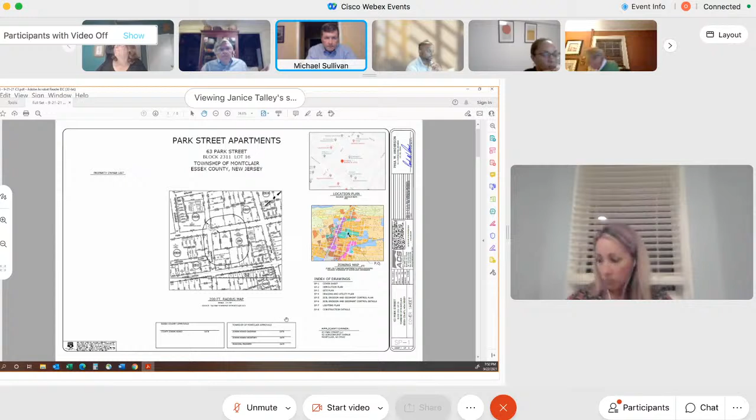Okay, Mr. Anderson, would you raise your right hand? Do you swear to tell the truth in the matter pending before the board? Paul, I think you don't have your microphone turned on, Paul. Okay, Paul. Nope. Paul, we should be able to hear you now. Can you hear me? Yes. Oh, perfect. Yes, I do.

All right, would you state your name and address, please? Paul W. Anderson, 40 Miller Drive, Boonton, New Jersey. Thank you, Paul. If you please could very briefly go through your educational and professional background for the board. Sure. I have a Bachelor of Science in Civil Engineering from Clarkson University, 1983. I'm licensed as a professional engineer in the state of New Jersey since 1988. And I have been accepted as an expert witness before this board previously and many other boards throughout the state of New Jersey as a professional engineer and professional planner.

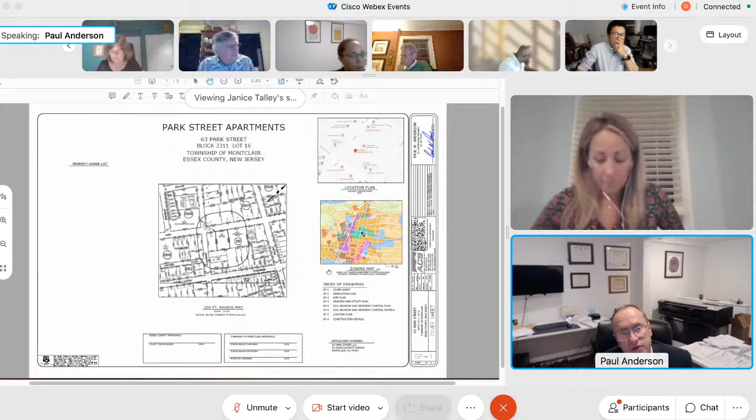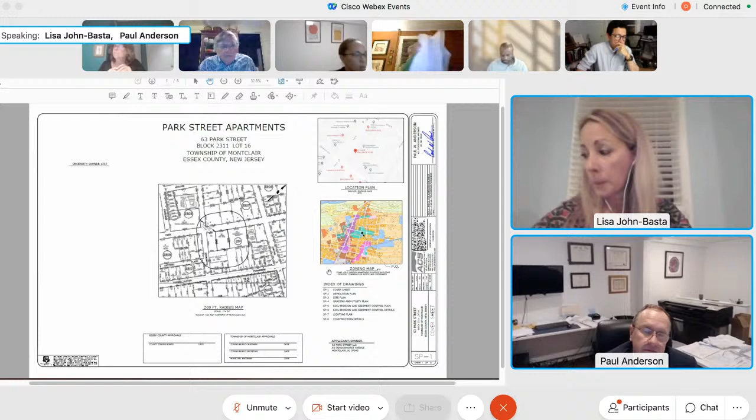Tonight I'll be talking about engineering. I am the principal with Anderson Consulting Services. We prepared the site plans that are before you this evening. And your license is still current in civil engineering? Yes, it is. I ask that you please be accepted as an expert in civil engineering. Okay. Thank you. Paul, if you could start by discussing the site aspects and the revisions to the plans that have been made since the last time the applicant appeared before the board.

Certainly. Previously, we had an addition of 900 square feet on the proposed structure, and that has been reduced to 372 square feet. And as mentioned in the introduction, that has allowed us to increase the side yard setback to the addition that is proposed from 7.8 feet to 20 feet. And that is a conforming setback in this zone. We also reduced some of the parking in the front of the building. So the reduction in the addition and the parking has changed the impervious coverage by 4.8% from what we had before the board last time.

The zone permits 70% impervious coverage, which is in this case 18,591 square feet. We previously had proposed a conforming 64.4% or 17,105. But with the reductions that we've made with this current submission, we have 59.6%, which is 15,828. So this is actually a reduction of impervious coverage from what is there existing today. Existing today is 62%, and we're going down to 59.6.

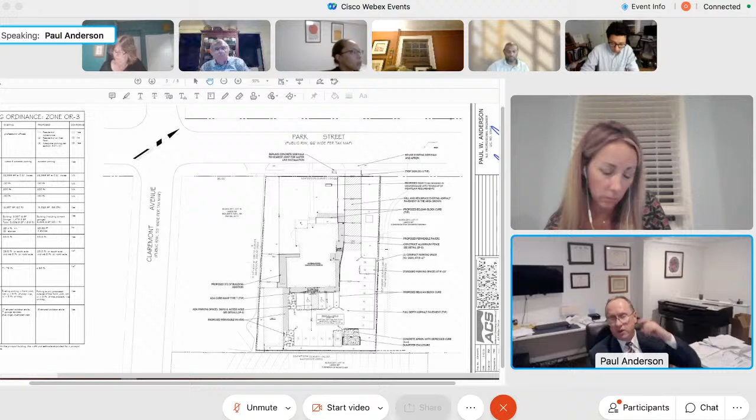The proposed is 38.93, but that is simply somewhat of a technicality in that the average grade around the building, once we connect the garage structure in the back, which has lower existing grades around it, changes the average grade slightly lower. So you have about a 6-inch change in the building height based on the calculation method. But what you'll see from Park Street is a ridge line that is exactly the height that it is today.

So if you look at the drawing on the screen, you'll see a hatched area of the driveway coming in. And if you know the existing site, you'll know that there is existing diagonal parking to the right of that driveway as you're looking at the plan. We were previously going to reuse that parking as compact parking spaces. We had proposed 23 parking spaces, but we removed 4 of the compact parking stalls, and now we only have 19 parking spaces proposed, 1 of which is compact.

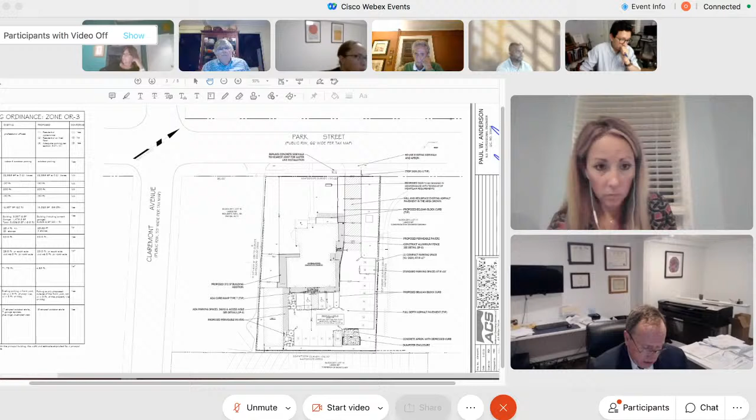And that allows for us to have a wider aisle. We have a 22-foot aisle in the area that is coming from Park Street to the back of the parking lot, and we have a 24.6-foot aisle in the back. Functionally, a 22-foot aisle is below your standard.

It does work in terms of most cars today are smaller than what you see on the turning templates, and what is required for 22 feet will make it with most small cars. If you have a larger car like a Suburban or something of that nature, it might have to do it in 2 moves, but it's still a very functional parking space, and that would be basically for 6 spaces that come down. After that, the rest of them have adequate aisle space behind them.

The number of parking spaces we propose is 19. The ordinance requires the greater of what is required for the office or what is required for residential. In this case, the residential is the controlling ordinance, 17.6 spaces, so it would be 18.

But also there is a new statute out that says if you provide vehicle charging stations, which we have 2, 1 on either side of the handicap spaces in the back of the building, then you can count those as 2 spaces. So we can reduce 2 from that, making the requirement for this project 16. We're still providing 19.

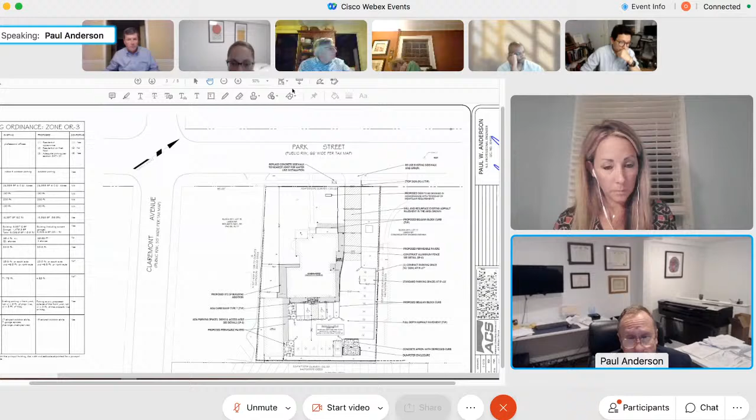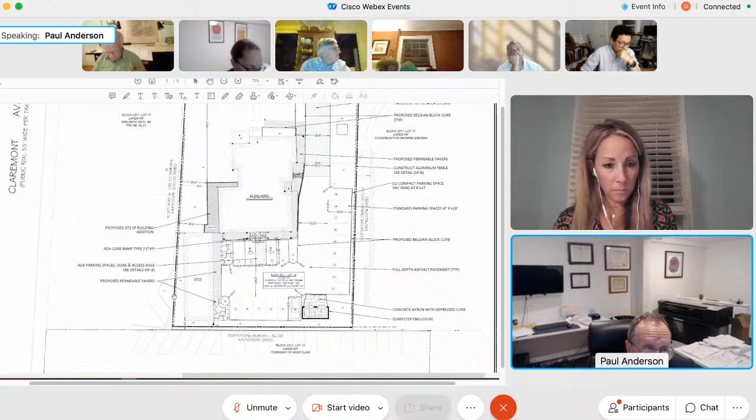As I mentioned, in the back by the 2 handicap spaces, I showed 2 small squares, and they're on the dividing line between the handicap spaces and the spaces next door. Those are intended to be the electric charging stations. And I thought I had them labeled. If I don't, I'm sorry, but that's what they are intended to be.

I selected that location to be between spaces so it doesn't impact the overhang, and also so that vehicles that were in the handicap spaces as well as the space next door could use the electrical charging station. So you could actually serve 4 spaces with that electrical charging.

There was some question previously about the location of the ADA parking stalls. I believe the location that we have is the best location, and it's compliant with the ADA requirements. There's a side door that goes into an elevator for the residential upstairs. There's no way to use the parking spaces 17, 18, or 19 for that because there's a minor grade differential there. So there's about a 2-foot high retaining wall, and the people who were using those spaces would have to come all the way down to the end to get behind the retaining wall anyway.

And then in addition to that, the slope on the asphalt in that area is 3.5%, which exceeds the slope requirement that ADA permits. So we have the parking spaces in the back, which have an access ramp and a relatively flat sidewalk, meeting all the slope requirements, going right to the lobby where the elevator can get them to the upper stories. And I believe that this is the closest, most convenient place for the ADA to access the building.

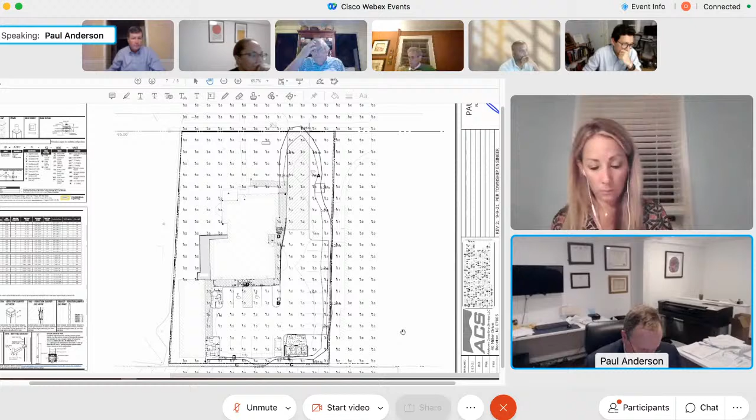And Mr. Anderson, you're making comments, kind of, we're not sure what you're addressing exactly. So I think if you're going to say, for example, you're addressing comment 3 in the Suburban Consulting Engineer report, you should tell us. If you're responding to Ms. Talley's memo, she had 3 comments, you should tell us so we can kind of keep track of where we are. Okay, yeah, I'm sorry. I will do that. So there was a lighting comment, I believe it's in Suburban Consulting. So I can find the number.

Mr. Sullivan, I believe that the lighting comment related to the prior planning letter that was issued by Ms. Talley. Well, let me ask you, okay, so let's start with, I assume you have the September 17 report from Suburban Consulting, correct? I do. And I assume you have Ms. Talley's September 13 memo, is that correct? That is correct.

All right, so basically the comment in the original letter was that the lights have to be 2.5 feet off the pavement, and they have to be at the center, between two parking spaces. We have one light that would need to be relocated. It's the C light that's at the bottom of the page on the left side, approximately 3 feet to the left. And that would not impact the lighting intensity on the municipal parking lot or the design on site in any significant way. We would still meet the lighting standard. So we can meet that comment that was on the original planning memo that was provided for the project.

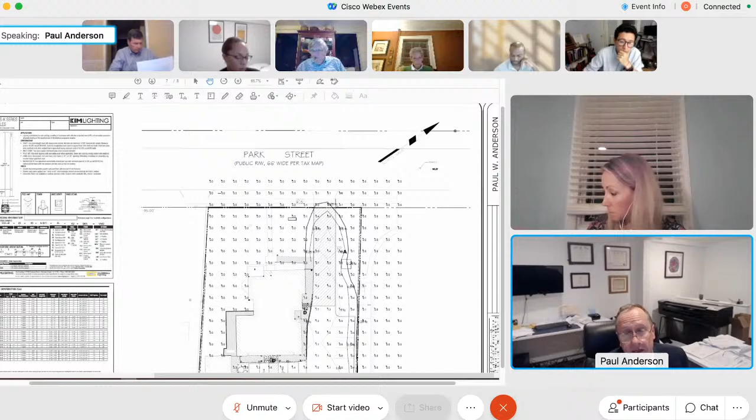So the next thing I want to talk about, I'm trying to find the location in the report, if you don't mind. Give me just a moment. There's a question about the utilities. There's a comment in the Suburban Consulting report indicating that we should verify that no new utilities are needed. Our intention is to use the existing sewer lateral, existing gas service, and existing water service to the building. And so we do not propose anything new there.

The only thing that we do propose that's new is to take an electrical service from the pole line that's in the back, which is shown on the drawing that's on the screen now, and run it underground to the transformer in the front of the property, and then into the building. So its location will be determined primarily by the electrical company, but our intention is to put it in that location. That's what we're going to be asking them to do. That was comment number 16. Thank you.

With regard to the stormwater comments in the Suburban Consulting report, he notes that it is not a major project any longer. I concur. It's also not a minor project. The minor project in the Montclair ordinance requires an increase of 250 square feet of impervious. And as I previously testified, we have a reduction in impervious for the site. So this is a project that does not really have any requirements for stormwater other than what is best practices for the site in particular.

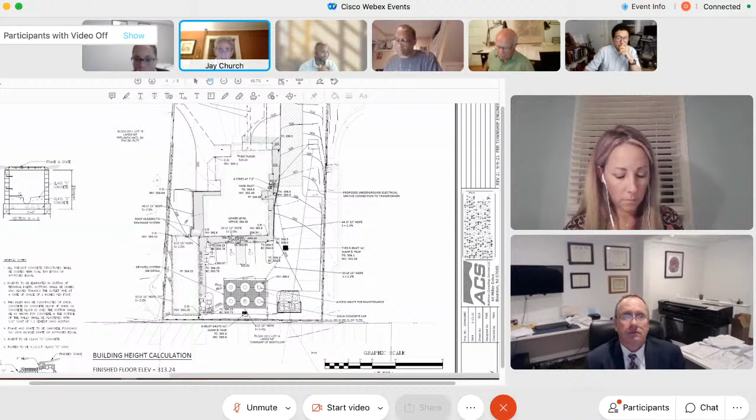Yeah, a lot of that parking, Mr. Fleischer, is existing parking. It's already there. We're just reorganizing it on the existing asphalt. I understand. It just doesn't meet the requirements of the buffer, which we'd like to have. But other than that, I'm not going to comment any further at this point. Okay, Mr. Church, do you have any questions? I have no questions, no. Mr. McCulloch, do you have any questions? No, I don't really have any questions. I'm a little bit confused, because there's so much information shared with us, as to which variances are actually before us for this meeting.

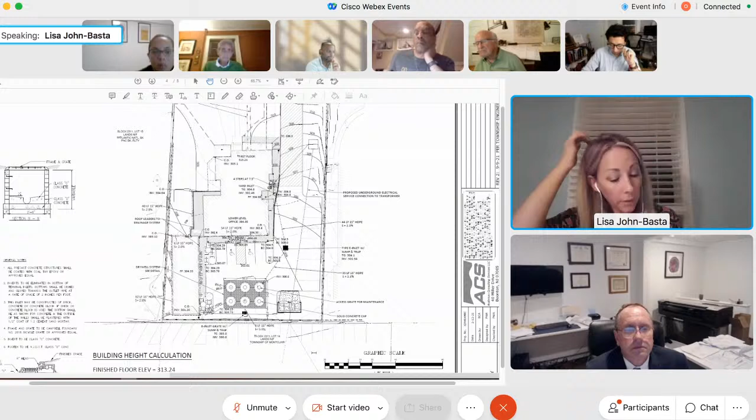Mr. Best, I assume your planner is going to go through the variances that are still required? Yes, that's correct. If you wanted me to just go through it briefly, we do need a D3 variance, which is to deviate from a condition of a conditional use, which does not permit residential on the first floor. We need the D6 height variance because we are exceeding the maximum permissible height by more than 10%, as well as a C variance because what's permitted in the zone is a 2.5 story building, and 4 stories is proposed.

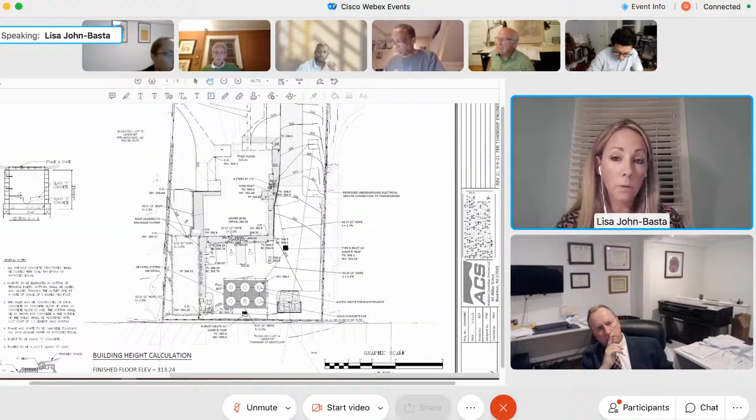We also need a minimum side yard and rear yard variance, which is solely due to the function of connecting the existing garage to the building. We're not making any modifications to that structure, but because it's now attached to the building, it's no longer an accessory structure, it's a principal structure, so the deviations are triggered. And that is the totality of the variance relief required. Thank you very much. Appreciate that.

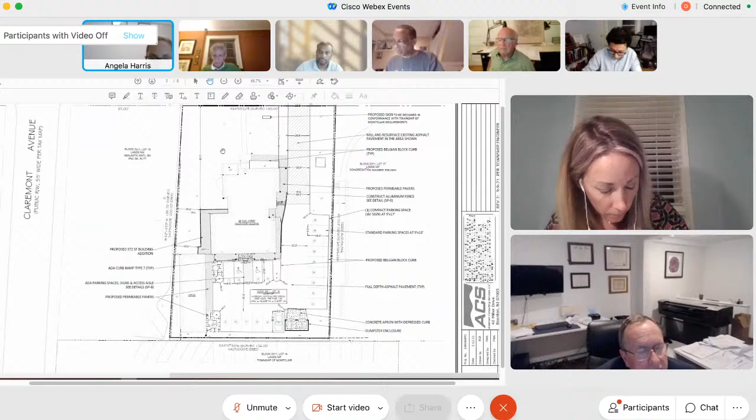Mr. Simon, do you have any questions? Questions? Ms. Harris, do you have any questions? Point out the electric vehicle charging stations. It's a little bit hard to see on the plan. Yeah, Janice, if you could focus in. Those two rectangles here are the vehicle charging stations between parking spaces and available to any of the spaces between 1 and 4.

Okay. And do you have any details? The entire lot will be wired, will have conduit for the vehicle charging also. It's just that the actual installation will be done at the beginning in these 2 locations. I'm sorry, could you repeat that? So the entire parking lot will have conduit available so that the wiring can be run at a later date when other vehicle charging stations are added.

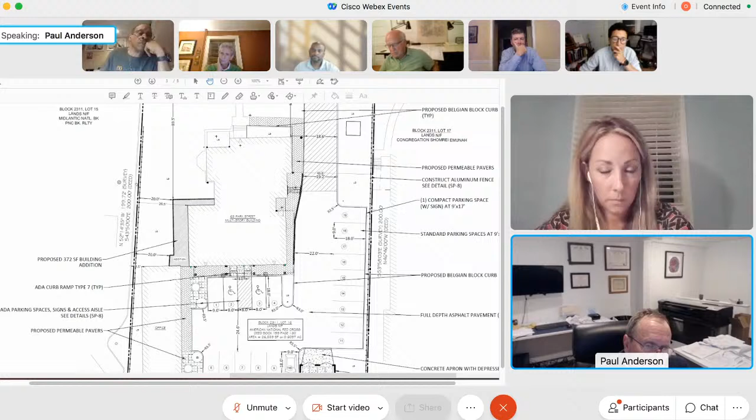Okay, thank you. And then do you have any details of the station, like what's the width of the sidewalk available in those areas? Well, that's a 6-foot wide sidewalk. And we're already accounting for a 2-foot car overhang, and we have 4 feet behind it, I believe, for this. We do not have a model picked out. I don't think it's going to encroach on the width of the sidewalk any more than the 2 feet. Okay, thank you.

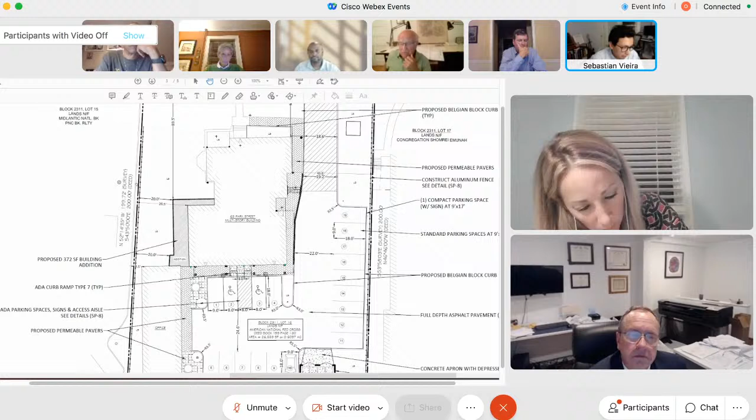Okay, Mr. Vieira, do you have any questions? Yes, Mr. Chairman, I have a specific question for Mr. Anderson regarding comment 11, regarding the stormwater management, where your drawing shows the dry well is connected to the parking lot, because I see an inlet. Can you reconcile that comment to your drawing? Because I'm a little confused if that's the case, or what is your recommendation?

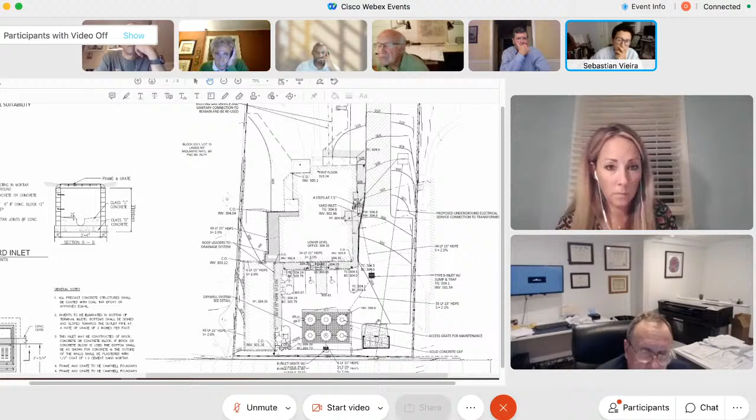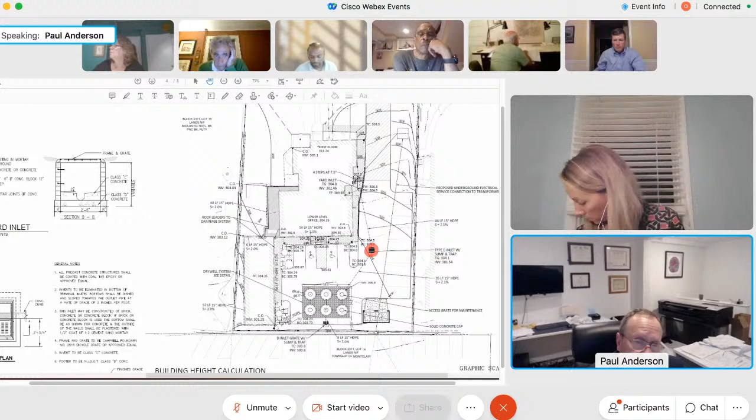So with number 11, we have an inlet with a sump and a trap. Basically the inlet has a depression that's lower than the outlet pipe. So sediment, like sand from the parking lot, goes into the inlet and cannot go out. It fills the sump, so it doesn't run grit and so forth into the dry well. It also has a trap, which prevents solids and oil from getting into it. It allows water to stay in there and keeps the oil from running into the groundwater when recharging to the ground.

And as I mentioned before, this is all sized in excess of what needs to be on a site per your ordinance. But all the water from the impervious areas on site will be directed to these 6 dry wells that we have under the ground. Okay, thank you, Mr. Anderson. I'm satisfied with that answer.

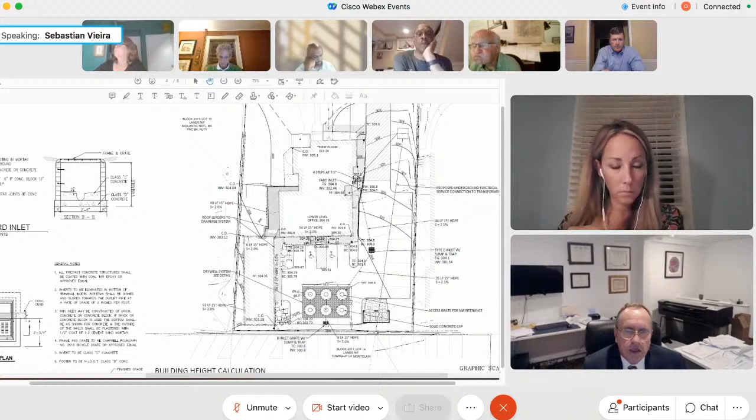The second question I had is regarding the ADA parking spaces. So question number 8, you mentioned that the current slope exceeds the ADA requirement. Can you clarify that, or did I misunderstand that statement? So there was a comment at the last meeting, could we move the parking spaces from these 2 that are now circled on the screen over to the side access door where the residents will make most of their entrances. And I was simply pointing out that there's a little retaining wall there that's a few feet high between those parking spaces, so they can't go directly there.

They have to go all the way back to the back corner of the building where the retaining wall ends and around. So those spaces would not be convenient. In addition to them not being convenient or the closest path to the building, they also have a slope of approximately 3 or 3.5%.

And you can't exceed 2% for ADA standards, and so they aren't conforming slope-wise. In order to make them conforming slope-wise, we'd be regrading the entire parking lot. And it just seems a lot simpler to go back where you can go in and then you have the commercial doorways in the back that are right near where these ADA spaces are.

And you have a level walkway that goes all the way from the ADA spaces around the corner to the lobby where the elevator is for the residential. And to me, that seemed like the most convenient and most compliant with the ADA code. Okay, thank you. And so, just so I understand correctly, the walkway that is between the building and the retaining wall, what's the slope of that walkway? It's less than 1%. Okay. All right, I'm satisfied. Thank you.

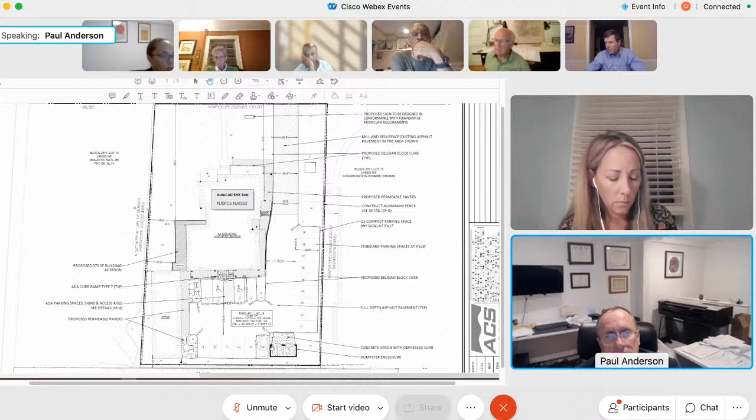But there would be the ability for cars, if larger cars park there, that they would be able to have their front end 2 feet over the curb line. Is that correct? It is. They would probably at that point be hitting some of the shrubs that are planted. That's obviously my issue, and I'll go over that with him in terms of the plantings that are proposed there.

There seem to be two kinds of cars in the world these days: small ones and large ones. And the standard size car is not too common. And just in terms of my parking in various lots around town, there are a lot of larger size cars.

I want to then go over that there is a possibility that we only have one compact space. We could assign some of them as compact spaces to eliminate some of your concern with them running into the shrubs, and try to keep the Suburbans and other larger vehicles parked in the back. I forget what the percentage of compact cars is, but I think it would take up a good number of those ones that you're concerned with.

Well, okay. But the provision in the ordinance concerning the overhang says that the overhang is unobstructed, and obviously if there's shrubbery in that area, I would not consider that unobstructed. So then we would get back to needing the relief for the parking size at 9 by 18 without an overhang. I'm going through, because you kind of skipped around on the engineer's memo. Just bear with me as I'm making sure I don't skip any that were not addressed.

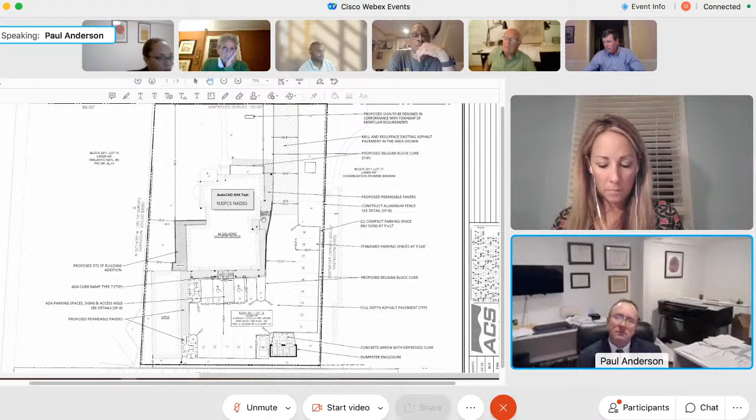Okay, but the inlet is located away from that whole area of the parking lot that is by the parking spaces bordering the municipal lot and the handicap spaces and the electric vehicle charging spaces. Isn't that area going to drain directly into where the dry wells are?

No, they'll go to the inlet that's behind the dry wells, which also has a sump and a trap. Okay, so the one that's in the driveway collects primarily the flow that goes down the driveway. And then the lion's share of the flow would be collected at the low point. That's at that second one that was circled in the back next to the municipal lot.

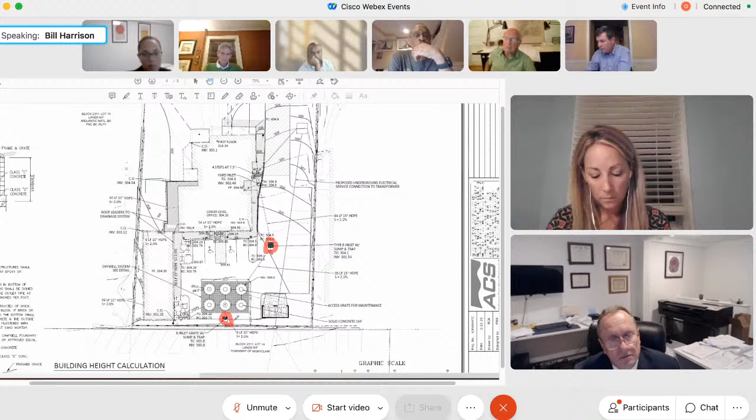Right, where I'm struggling a little on that is your contours kind of disappear. Yeah. You know, I'm following it fine going down the driveway, but I'm not seeing where that entire area is going to flow into that inlet. And I guess part of the concern is it's going to end up flowing into the municipal lot. No, well, we have a curb line there that keeps it from overflowing. It's just, it'll be a lot.

There's a very small inlet there today that seems to be doing basically the same thing, only we're putting a standard B inlet grate, which is much bigger than what's there, to collect the water and setting that as the low point in the parking lot. And so that's how we're doing it. We're making it much better than it is currently today.

And I haven't seen any evidence of this parking lot historically flowing over to the municipal lot. I haven't seen any erosion coming from one to the other. And I think we would see that given some of the storms we've had recently with flow escaping from there. So I think it's going somewhere. We just haven't dug up a hole and found it. But I think our plan is duplicating it with something that is enlarged with more capacity to accept the flow and to filter the flow before it goes into the dry wells.

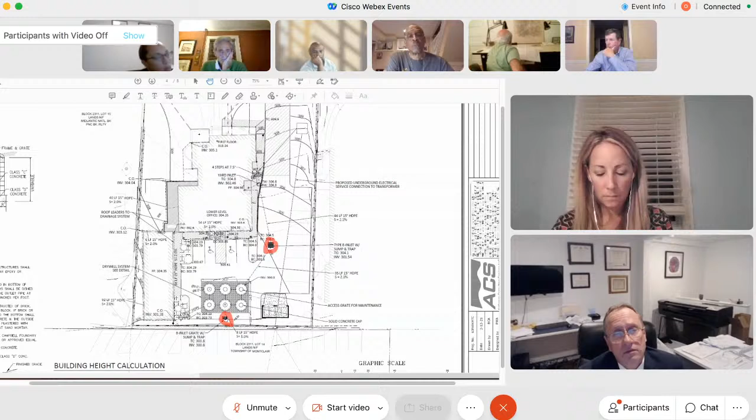You know, I guess part of my concern, since we seem to keep having these larger storms, the curbs are 3 inches high or 4 inches high? 6 inches high. 6 inches. So I still think, in a heavy storm, it's still going to end up flowing over, the inlets aren't going to be able to handle it. What is the outlet from the dry wells? There's no outlet, it's just into the ground. There's no discharge.

I mean, I think we have to understand that we're reducing the impervious coverage on site with these improvements and reducing the amount of flow that could potentially go towards the municipal lot. And we don't have any evidence, even with these massive storms we've had recently, of water ever coming onto the municipal lot and creating any damage from this Red Cross lot. So I think that what we have will not only function, but it'll function in a superior way, and it's even more protection for the municipal lot itself. Okay.

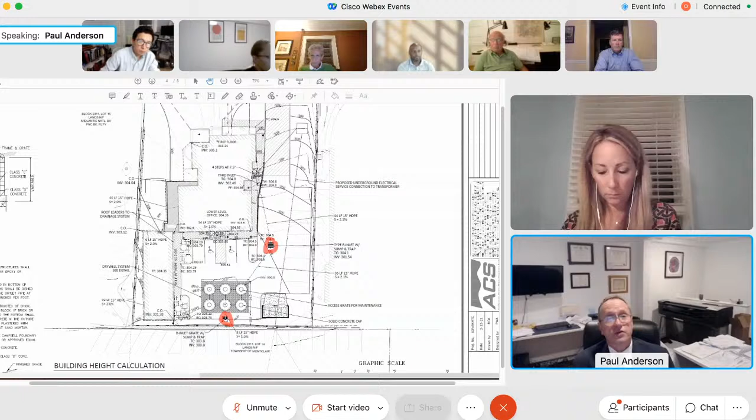What is the capacity of the dry wells? So I sized it for 2 inches of rainfall over the entire impervious area of the site. So if 2 inches of rainfall happens instantaneously, it'll just go into the dry wells, and you won't see anything on the surface. Now, your ordinance has, for a minor drainage plan, which doesn't apply to this either, 2 gallons per square foot. And this provides about 50% more volume of storage than that requirement.

When you say it has capacity for 2 inches, I guess what happens if the storm is more than 2 inches, since we've had 2 of those in the past month? Well, yes, it's 2 inches on the impervious, all of which would run off, and it would fill up and start filling the parking lot up. To a depth of 6 inches, and then it would overflow. A depth of 6 inches before it discharged next door, correct.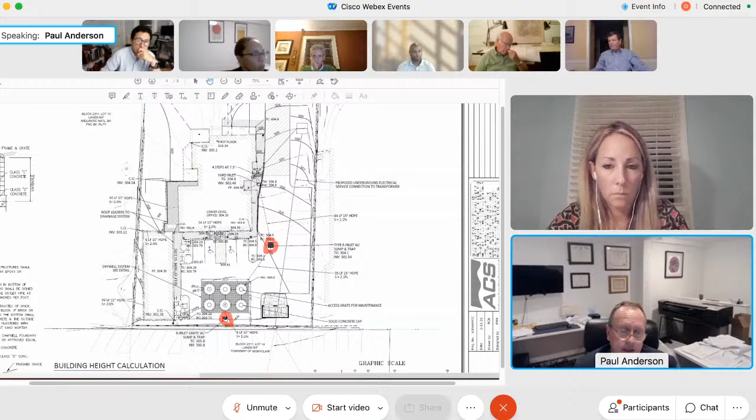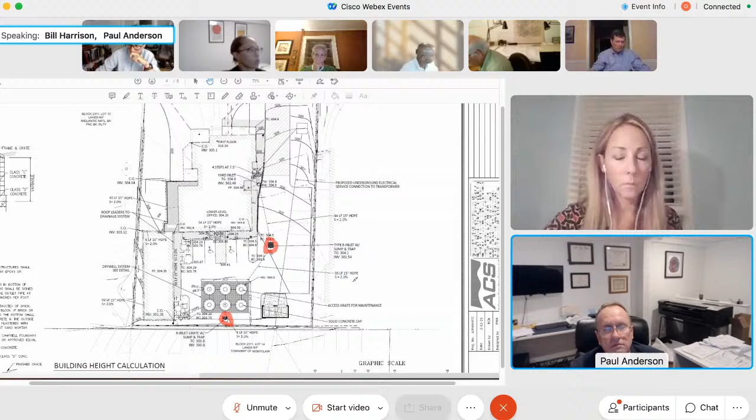And then, okay, so you indicated that the existing gas and sanitary connections would be used. The gas I don't have an issue with. But the amount of wastewater flow from this building is going to be significantly more than what it was when the Red Cross was using the building. Have you looked at the size of the existing sanitary sewer pipe and confirmed that it would handle the flow from both the offices and the residences? Yes, I have. And your determination was it is adequate? It won't even flow half full.

I have no further questions. Are there any members of the public who have questions for this witness? And this is just an opportunity to ask questions. There'll be a later opportunity to provide comments. Janice will unmute all the lines, and if you want to say something, speak up.

Is there anyone? I'm trying to unmute everybody, but it's not... For some reason, I don't know why it's not allowing me to unmute you. Do you have your audio turned on? Those of you members of the attendees, members of the public? What I can do is I can temporarily make them panelists, and hopefully that way, if anybody has a comment, they can then make a comment as a panelist. So I'm going to try that since I'm not able to unmute. Okay, members of the public, I have now made you panelists. Do you have any questions, I should say?

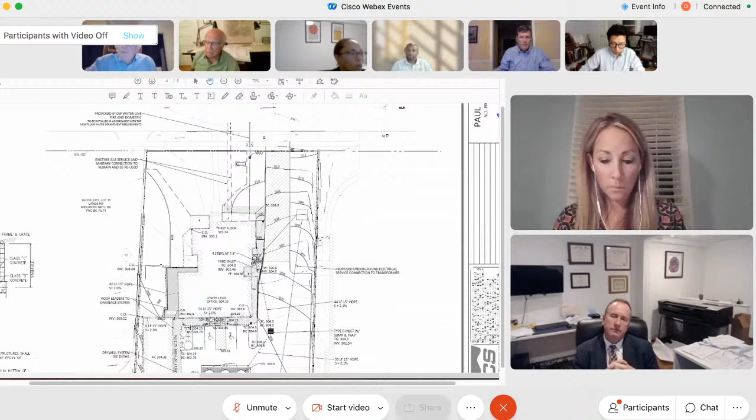Mr. Horrigan? I know Ms. Rombauer, you're for the next application. Mr. Hargan's with us. He's on our team. Yeah, okay. I don't think we have any questions. Okay. John-Basta, do you want to call your next witness? Yes, please. Our next witness is Jackson Bangs with Sionas Architecture. Mr. Bangs, would you raise your right hand? Do you swear to tell the truth of the matter pending before the board?

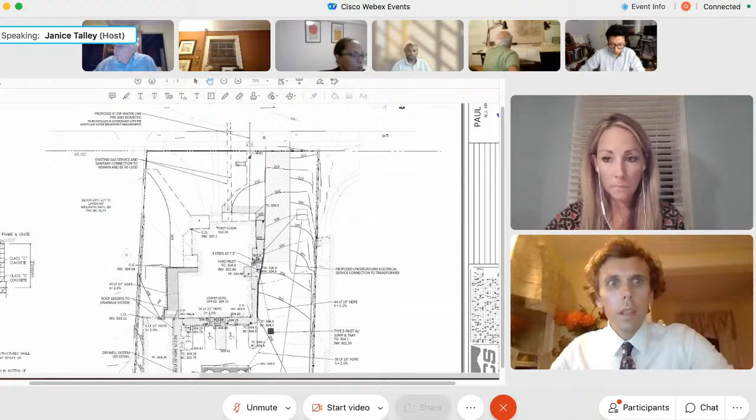Jackson, do you have... there you go. Okay. Yes. Can you hear me now? Yeah. Okay. I do swear to tell the truth. Would you state your name and address, please? My name's Jackson Bangs, 8 Hillside Avenue, Montclair. Jackson, have you previously testified before this board and been accepted as an expert in architecture? I have not previously testified before this board. However, I have testified before the planning board. Okay. If you can briefly go through your educational and professional background.

Certainly. I received a bachelor's of architecture from the University of Notre Dame in 2012 and have worked at 2 different firms since then, including Sionas Architecture in Montclair for the vast majority of that time. I have testified before boards in both Montclair and Bernardsville, where I was accepted as an expert in the field of architecture. I ask, please, be accepted as an expert in architecture. Yes.

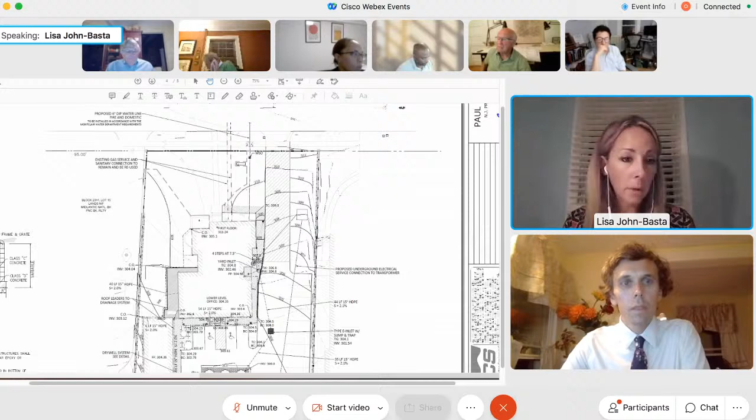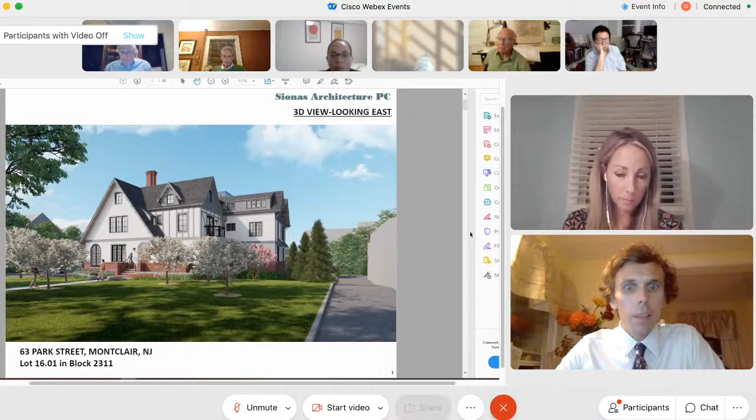Jackson, the scope of your testimony this evening is related to particularly landscaping. You've heard some comments from the board. Can you address the general landscaping plan for this project and what revisions we've made since the last time we appeared before the board? Yes, I would be happy to do that. We've prepared a PowerPoint presentation that will include slides that I'll be discussing, as well as slides that my colleague Ryan Robertson and our professional planner will also be speaking about.

Okay, I know we marked a previous PowerPoint presentation as Exhibit A1. Janice, were there any other exhibits in your notes? No. Okay, so let's mark this as Exhibit A2. And I don't see a date on it, but okay, it's what you're presenting now. There are dates in some of the pages, August 18. Okay, so A2 would be PowerPoint presentation dated August 18th. Correct. I think that was the date of the original presentation. Yes, some of the slides we included from the original presentation for reference at the end of this presentation, just for convenience. So some of that date appears on some of those slides.

Okay, I do see on the landscape plan, there is a revision date of September 10, 2021. Let's go with that date. Thank you. Okay. Jackson, if you could discuss the landscaping. Certainly. So as Paul Anderson described, we've reduced the size of the building and of the parking area, which has resulted in an increased amount of green space available for landscaping. Jackson, I don't mean to interrupt you, but I'm going to. Is there a particular slide that shows the landscaping plan well on this slide presentation? Yes, the next one. Oh, actually not the next one.

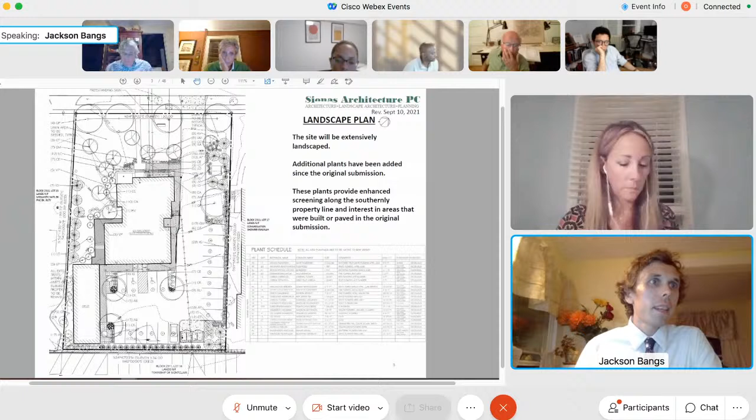Next slide. So as Paul explained in the last hearing, all of the plants that are proposed are native to the Essex County area, and they've been selected for drought tolerance and deer resistance. We've called for a mixture of deciduous and evergreen plants, and have chosen many that flower at various times of year.

All of the new plants comply with these same guidelines as well. You will see that, as Paul Anderson testified to, where parking was eliminated from the northern side yard, we now have a larger landscaped area behind the potential location for an electrical transformer, which may or may not be needed. We don't know if that will be necessary yet. That's largely up to PSE&G. But if it is, we've proposed plantings for that area that will screen it nicely.

So the change in this area that you'll see is that where we've eliminated parking spaces, we're now proposing one additional willow oak, which will eventually grow to be at least 40 feet tall. And then under and behind this tree, we're proposing a mixture of New Jersey tea and wild geranium plants, which flower in late spring and early summer. They'll provide nice ground cover in that landscaped area.

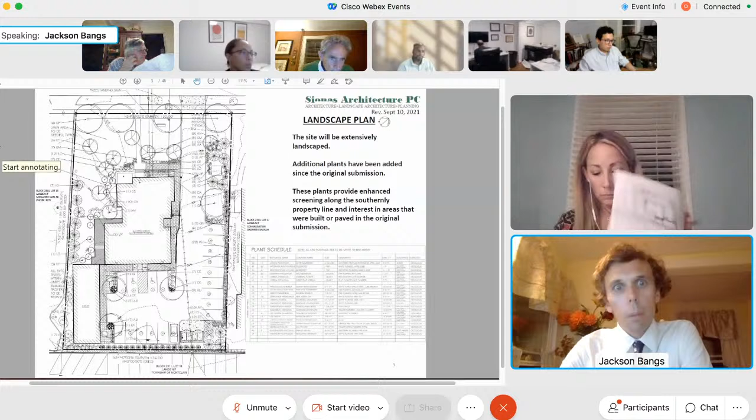Moving eastward along the property line, we're proposing a row of shamrock inkberry, which is going to grow to be about 3 to 4 feet tall. It's an evergreen, and it will help shield headlights from cars that are parking as they're pulling into that area. Jumping to the opposite side of the property, in the southern side yard, we have a lot more space available than we did previously. So several of the plants that we've added there are intended to help soften that wall of the building and provide some screening for portions of it. Next slide, please.

So I'd like to draw your attention to two specific plants, both of which we're using for this screening that I was describing. The one on the left is the American holly. That's represented in the landscape plan by an IO symbol. We're proposing 7 of those along the southerly property line, which will soften the view of the proposed addition, and in time, as they grow to be 7 to 8 feet tall, they'll hide a good deal of the first floor from somebody who's standing at the lot currently occupied by the former PNC Bank, or from someone walking along the sidewalk on Claremont Avenue.

Other lower plantings that are shown on the landscape plan will add interest and further soften the building edge where it meets the ground. The plant on the right-hand side, the Brodie Eastern Red Cedar, which is marked with a JV on the site plan, will screen views of our parking lot from the existing municipal building parking lot, and vice versa, which will be nice for people on both sides of the property line. We're also proposing 7 of them adjacent to the synagogue in the vicinity of the transformer I was discussing previously.

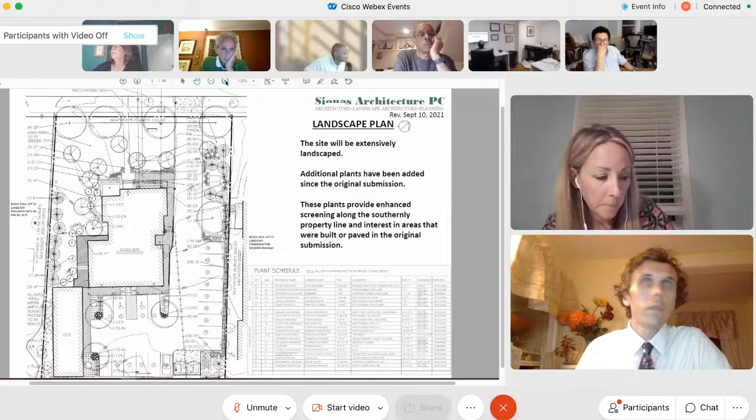Can we sort of hone in on the area at the intersection where the building and the office building sort of meet in the parking lot? I'm not sure I understand what the plantings are that are shown there. You mean here? Yeah, any one of those, what I'll call those corner islands, what are those there? The areas under those trees. Well, no, I'm talking about right in the parking lot, that area that's being circled by Janice.

Yeah, so the tree is an American yellowwood tree. And then underneath of it, we are calling for, let me see, AU, which is bearberry. Thank you. What about the 4 IGs? What are those? IG is the shamrock inkberry, which is the same plant that we're calling for along the northerly property line. And what's the size of those plants? 3 to 4 feet at full maturity.

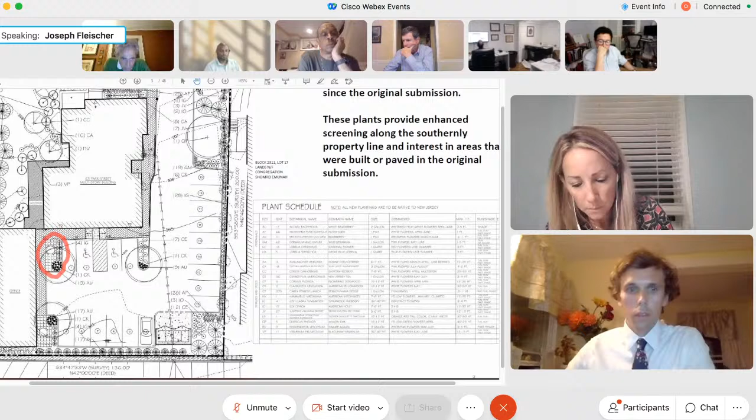I guess my question there is, and I could ask that same question about parking item 10, but in that place, for example, how does a driver open their door? You have the spot there, you have the plants, you have a regular size car. How does anybody get out of their car on the left-hand side, which is where people would normally go if they were trying to open the driver's side door if they fronted into the spot?

I'm just interested in how that would work. In a sense, you do it on the other side as well, on the lower side. And how does a passenger get out of the car? I'm not sure that the plants aren't too tight right up against the parking itself. And I know it looks like you're trying to put a nice little table and chair in there so someone can sit outside, and that's great, but how does the parking lot get used?

And just as a quick sort of follow-up to that, we talked about unassigned spaces. So how do we know how these spaces are going to be used relative to the inhabitants of the building? Not everybody takes their car to work, so a lot of these vehicles may be there during the day. I'm just trying to understand how it's structured in order to accommodate all the parking that's required primarily by the residential building.

We can certainly consider alternate plantings in that area. You make a good point about access to car doors. And the same thing happens next to the dumpster. And the same thing happens essentially every place where you put these plantings tied in against the parking spaces. So I do have a concern about that. That would be space 19. Yeah, and space 11. 4, 1, I guess it's 5, 10. I mean, there's a whole bunch of them that all have that same problem of being right up against the plantings.

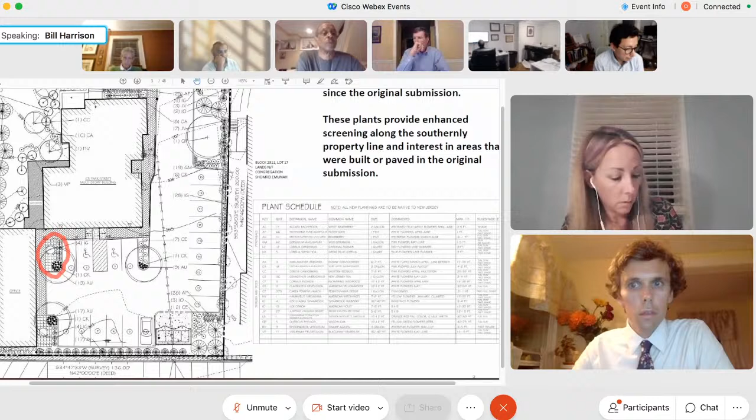Okay. I have some. I want to follow up on what I was asking the engineer in terms of the inkberry that are along the northern property line as to how far from the property line would those actually be planted? Well, there's 3 feet available, so presumably we would plant them somewhere right in the middle, about 1.5 feet off of the property line. And how broad do the inkberry typically grow? Off the top of my head, not sure, but I can look into that. I think they're generally slightly less wide than they are tall, but about 3 feet or so. So they would fill the area. So if the cars were relying on an overhang, by definition, they would be hitting the bushes. Is that correct? Yes. As Paul Anderson said, it seems unlikely that most cars would really need that overhang, but if they did, they would hit the bush.

I'm now on the eastern property line in the red cedars. I'm somewhat fascinated. I mean, those were very nice pictures you showed of red cedars, and that certainly is what they look like when they're young. But I question whether trimming them will actually enhance their screening ability, and it's the same basic question. I assume those would be planted basically in the middle of the space between the property line and the parking lot, and I would be surprised if they retain the thick vegetation at the bottom as you prune them. It's just not been my observation as to what happens. I think they tend to thin out, particularly with pruning when they're not maintaining their natural, pyramidal type shape.

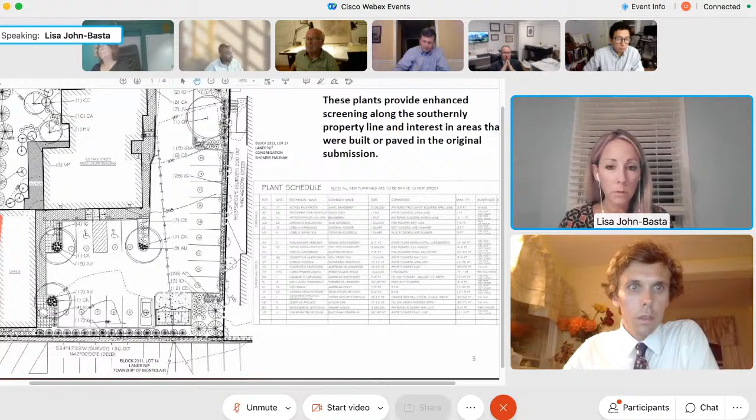Ms. John-Basta, do you want to call your next witness? Yes, our next witness is Ryan Robertson, also with Sionas Architecture. Okay, would you raise your right hand? Do you swear to tell the truth in the matter pending before the board? I do. State your name and address. Ryan Robertson, 8 Hillside Avenue, Montclair, New Jersey.

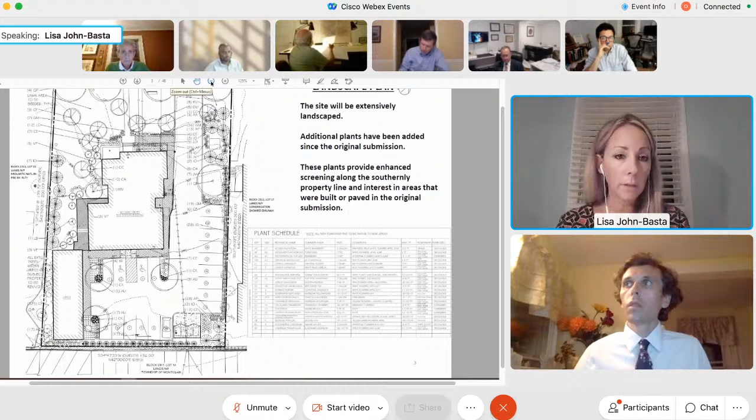Ryan, if you could briefly go through your educational and professional background. Sure. I got a Bachelor of Architecture from North Dakota State University in 2003. I'm a licensed architect in the state of New Jersey. I've worked for several years with Paul Sionas, and I've been accepted as an expert before this board. Ask to be accepted as an expert in architecture. Okay. Thank you.

Okay, Ryan. Okay, Janice, would you go a couple slides? I think it was the one after the trees, maybe 2 slides forward. Yeah, right here. We'll start here. So I'll start with just a general overview of the architectural modifications that happened as a result of our addition complying with the 20-foot setback at the south. We reduced the size of the addition, so you can see the addition's impact highlighted in blue here on the ground floor.

We've opted to keep the connection at the garage, but I know this was just brought up by Mr. Fleischer, so we can discuss that a little further about what if we didn't connect. But when we decided to set back, you can see that slope where it connects. That is actually the line of the 20-foot setback, and the rest of it's perpendicular. So we chose to keep it because the option was there. But we can talk about that further in the questions and comments.

Setting it back to that, we then had to modify some of the office spaces a little bit. We eliminated a rental office that was previously shown and reconfigured the residential storage spaces on this floor. And then the other impact of our redesign is that we went from 10 dwelling units to 9. So just to talk about the numbers a little bit, the addition you see there shaded in blue previously was shown as 900 square feet. What you see now is 337. That's a decrease of 563 square feet. We lost 1 residential unit from 10 to 9.

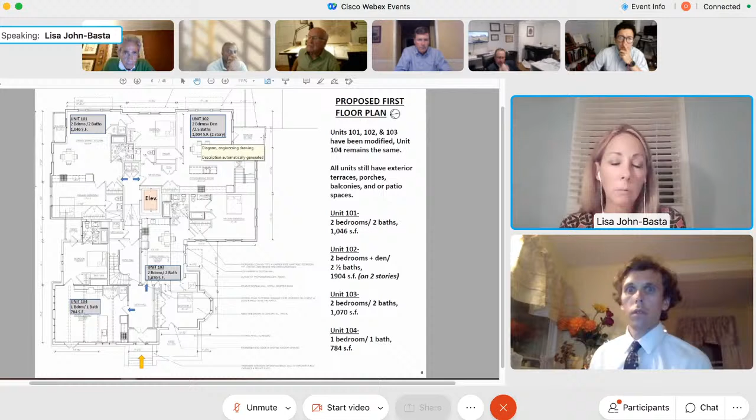Yeah, I can state that as well. So this zone does not permit more than 1 principal structure on the lot. So if the building is not connected, we would need an additional variance for that. Right. Okay. So I think if we were to be granted that variance instead, the applicant would be open to disconnecting and losing this terrace.

And then to go into the details a little bit about each of these units, 101 will remain a 2-bed, 2-bath. It increased in size from 1,025 square feet to 1,046. Unit 102, this was the biggest change probably on the plans. It was a 2-bedroom, 2-bath at 1,355 square feet, but it's been modified to be a 2-bed, 2.5-bath, and a den at 1,900 square feet and 1,904 square feet, and it's a 2-story unit.

It's the biggest unit. Unit 103 was a 2-bedroom, 1-bath at 879 square feet, and it's been modified to be 2-bedroom, 2-bath now with 1,070 square feet. And as I said earlier, unit 104 had no change. It was a 1-bedroom, 1-bath. It's remaining so at 784 square feet. Next slide, please, Janice.

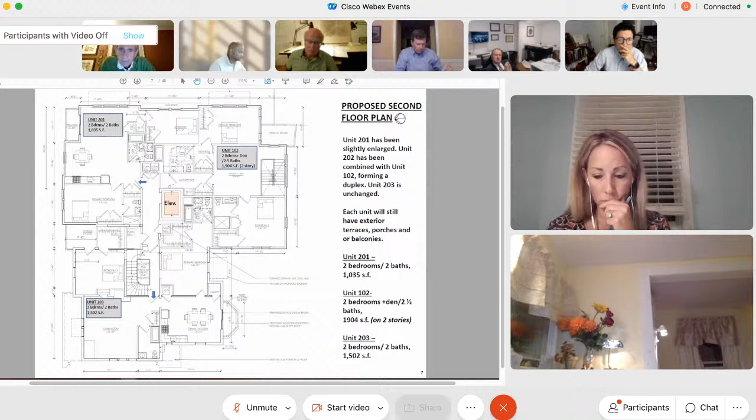The second floor here, unit 201 has been slightly enlarged. Unit 202 is missing now because that's shown where unit 102 is shown, which became a 2-story unit. So the blue arrows to each unit, you see there's no longer a blue arrow leading into what was previously 202, right kind of north of that elevator. And again, you can see that each unit still has an outdoor terrace. Unit 102, we're seeing the terrace below, so it's not happening up at this level.

And here for unit 201, it will remain a 2-bedroom, 2-bath from what was previously shown, increased in size from 1,024 square feet to 1,035 square feet. Unit 202 I mentioned was eliminated. That was a 3-bedroom, 2-bath, 1,544 square feet. Unit 203 remains a 2-bedroom, 2-bath, and it increased slightly from 1,500 to 1,502 square feet. And next slide, please.

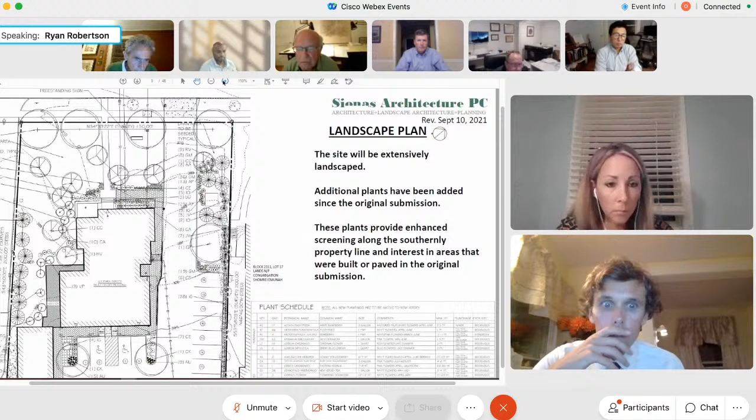But how does that work relative to the site plan? That's what I'm trying to ask. Is that an extra section of sidewalk on the site plan? Because we didn't see that. Yeah, that. Where are those piers? I think they're shown right there. Mr. Anderson said we have a 6-foot sidewalk there, so they're shown. Can you see them? If you zoom way in, you'll see them. Yeah.

Can we get in any closer? Oh, yeah. Yeah, there they are. Here you see it. So they have some pilasters up against the building, Mr. Fleischer, and then the columns are out. Are those necessary? We didn't do a structural design. I suppose we could cantilever it. But we haven't run calculations to study that.

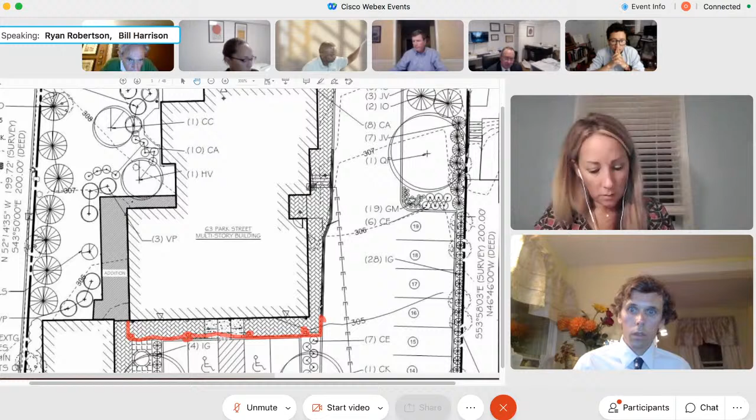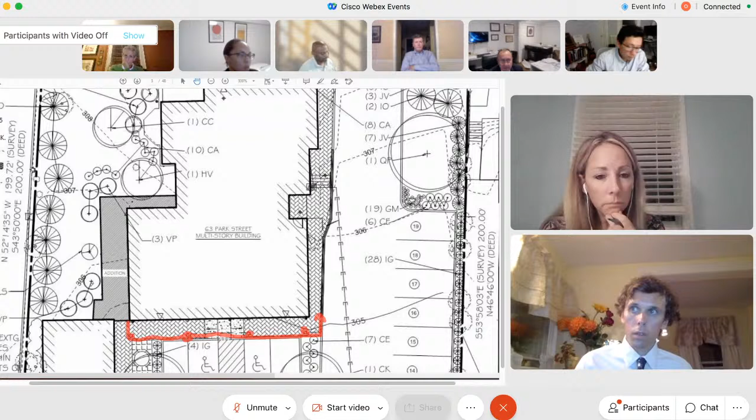I know, yeah. I mean, I can see cars hitting them. I can see a lot of stuff going on there that could happen, not to mention the fact that it narrows the walkway zone. One of them, from the looks of it, is right where you said we were getting a charging station, as a matter of fact. The second one from the left side. That was one of the charging stations that was identified. Yeah, I see that. So I think it's better if they're not there.

Those are being put in now, they're not existing, are they? They're not existing. No, this bold line that you see is the existing face. That's what I thought. So these are basically there to hold up what I'll call the first floor of residential. That's correct. Known as the first floor, but really it is the second floor in the 4-story building, which also led me to some consternation. I want to go back to the issue I mentioned about the floor plans. I think for me to feel comfortable with this, I really think that old historic garage needs to be fully separated from

this building. Amongst other things, we deal with a much smaller variance with regard to the rear yard requirement if this is an accessory structure as opposed to a primary structure. And Michael, does it automatically become a primary structure because it's being used as something other than a garage or a shed? Yeah, I think it becomes a principal structure, and I think then we run into a variance for having more than one principal structure on the lot. I think it's still a better solution, and that's why I'm asking whether or not that means we have to renotice because of the other variance, or how does that work?

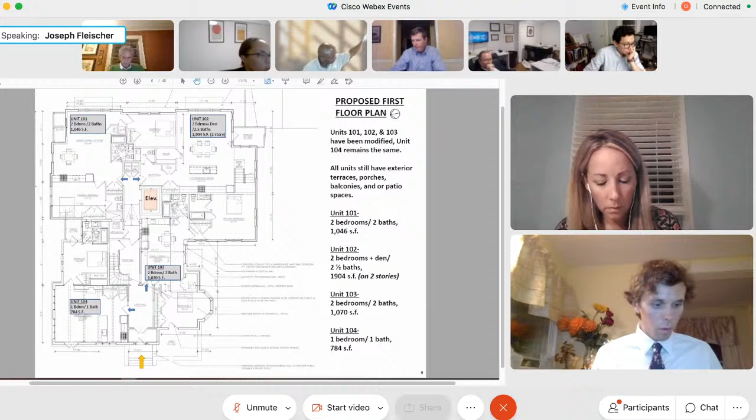to me, the building is better for a whole variety of reasons if the building down below follows the line of the walls up above, and really has this clear distinction between this residential building and this bank of offices that are in this old garage structure. You can still have a balcony up there. You can have a small balcony off of the living room, dining room, kitchen space, but not as large a balcony as that. There's nothing to stop you from putting a balcony on the next level up instead, but that's a different discussion.

So I have some issues with that whole knuckle, that whole connection. And let's go to the next floor, where I actually have what I think is a real safety issue, which I think is a mistake and is easily fixed.

That laundry room for unit 102, there used to be a door there when it was a separate unit. Right. I would urge you, for a whole variety of life safety reasons and other reasons, to put the door back in there. I don't care if you hang clothes in front of it, but it would be great to have a door to exit someone out of that apartment on the second floor in an emergency.

Yeah. And I wouldn't even mention the fact that it'd be a whole lot easier to move furniture and everything else into the unit if they took the furniture up to the second floor in the elevator and came in through that back door. So I would at least request and urge you to put in a second entry door on what is technically the third floor, but the second floor of units. Yeah, that's a good point.

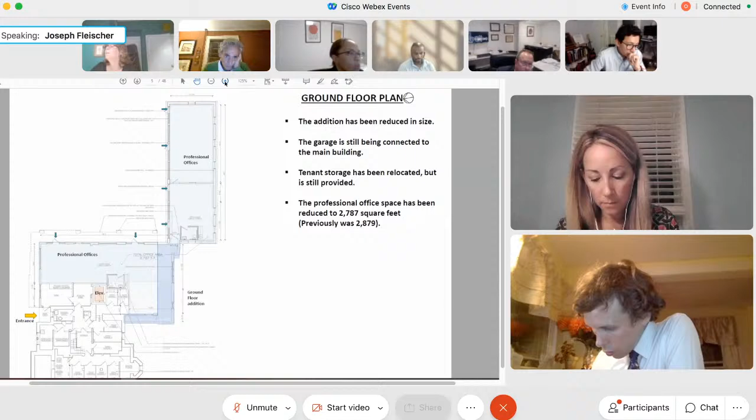Otherwise, I think the massing is a whole lot better than it was. I feel very good about it. Again, I think we'd be better off really separating the two office buildings. I also saw some toilets in the office thing. Let's go back down to the ground floor again. I assume those toilets, do the toilets exist? They don't exist? They don't. It's certainly not in the existing garage. I'm trying to think where existing plumbing is in that.

And you also show 4 entry doors into this space, which kind of amazes me, for that relatively small office area. And you have a whole partition wall, which I don't know will or will not be there. I guess that depends on the tenancy and everything. Is that required structurally or anything else? Or I think that's an existing masonry CMU wall right there where Janice is. And you're making the decision in advance to retain that wall? Looks like it almost has a window in it or a pass-through or something.

If I may address that question. Sure. Yeah, I made the field visit to the garage when we first visited the site. That is an existing masonry wall that used to be the end of the garage. The garage was smaller originally, and it was enlarged sometime, I believe, in the 1940s, although I might be wrong. So that was a door and a window from the original garage. Yes, that's correct. Okay. At least that clarifies it for me.

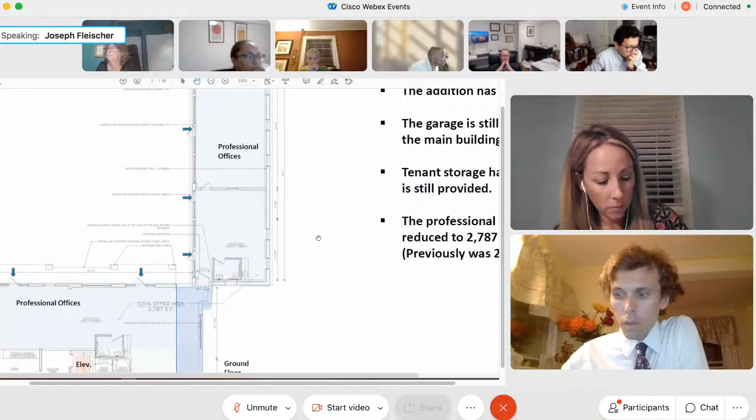I'm trying to figure out how you make this all work with those 2 toilets, unless you have interior corridors or something that you're proposing, which are not showing on these plans. So I know there were no tenants yet. I know you don't have the space rented out yet for obvious reasons, but it seems a little odd the way it's structured now. And if I was going to put in toilets, I'd put them in against the wall that's between the 2 sections, and then you can at least have them for both offices. It just seems very strange. It's not about any of the variances we're talking about or anything else. It's about the design itself and whether or not it's needed.

Yeah. So again, if it was up to me, I think we're better off making a very clear distinction and separation physically and in the massing between this garage structure and what is essentially the residential building with offices on the lower level. That's all the comments I have. Thank you.

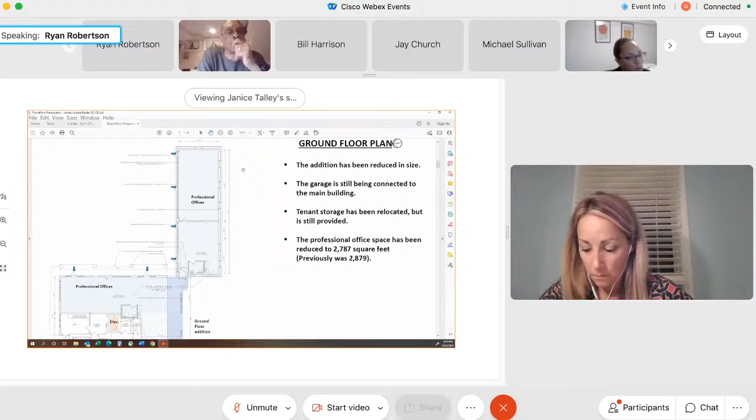So I know existing, there's a door that opens right at grade to asphalt with no real transition more than a ½ inch. But with Paul Anderson's site plan, he could testify to the exact height, but he's added a curb. So now what we're going to have is asphalt that's a little bit lower than the condition is in those areas. So water will have to go up 5 inches or 6 inches before it would come into the offices.

Let me interject. I'm confused. He testified the curbs would be 6 inches high and basically the parking lot would flood to that elevation. The garages are now at grade. I'm trying to understand why the water wouldn't go into those offices. Could we call Mr. Anderson back? He's probably the most appropriate professional to answer that question. Right.

Can you hear me? Yes. Oh, good. So the finished floor grade of the garage building is 304.35. The bottom of curb outside is 303.79. So you have that 6 inch plus of height difference in the asphalt area of the parking lot from the floor of the garage. So it would have to come up that 6 inches of flooding in the parking lot before it actually got to the office.

So Mr. Chairman, you're correct. I testified to 6 inch curbs. That's what we are proposing. And so it would have to be at least that. So the dry wells would have to fill up and then fill up the parking lot 6 inches before it started having an opportunity to go into the office space that's in the existing garage. And there's no open space under the garage floor at this point. Is that correct? That is correct.

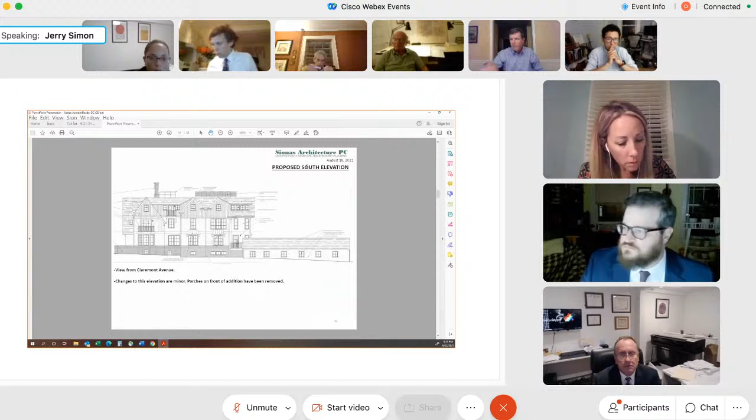Just a comment about the elevations. There are a lot of windows, especially on the north elevation, and they're all different sizes. So I would like to see some more consistency between the number of panes and the size of the windows that are used throughout the buildings, because it's a lot, and sometimes it's 4, sometimes it's 6. So just kind of keep that in mind from the aesthetics.

So that was just more a comment as opposed to a question. Okay, thank you. Ms. Harris, do you have any questions? I do, and forgive me if you've already gone through this, but can you just explain the reason for the connection from the garage to the residential building?

Sure. Early on, the applicant wanted to combine the office use. I think that was the first stab at it when we were taking a look at the zoning. And then it was determined that if we hadn't done that and they wanted to turn the garage into offices, it was going to require a change of use, and it could no longer be an accessory use, which is going to trigger another type of variance that we weren't interested in pursuing. So we decided to go with this.

And at the time, the addition was larger, so it made sense to just connect it all on one. And now when it's skinnier, it looks like we're forcing the connection, but originally it made more sense. It was a longer addition. Understood. And then if you were to get rid of the addition, other than that terrace, how would it affect the rest of the residential building?

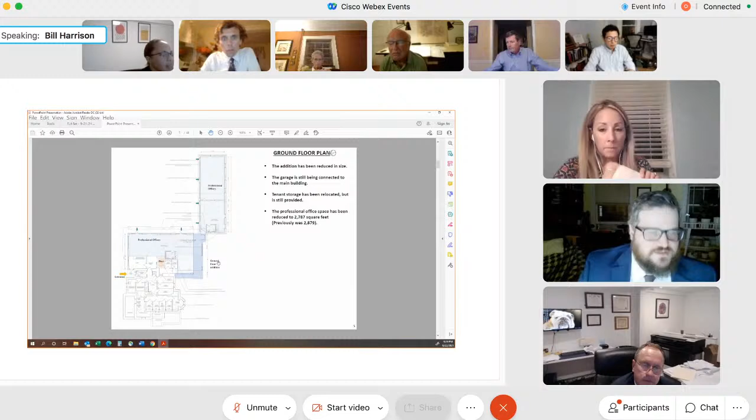4 existing and 1 new in the middle. Is that correct? No, I wanted the floor plan first. Okay. There's 6 shown there, but on here there are 5 shown. So I think I may have misspoke, and there are 5 original, and the 6th is a new window that didn't get picked up in the floor plan.

Okay, unless I was totally not paying attention on Sunday, I think there are only 4 existing. The 2 towards each of the ends of the building. I should have taken a picture while I was there, but okay. So you're adding 1, if there are 4, there are 5, or you want to end up with 6.

Yes, if you go to the elevation, Janice, I do have a note calling for the 4th one as a new window, so I'm pretty sure that one is new. And I guess the question is the 3rd one. The 3rd one isn't shown in that plan view, so maybe that one's also new and we missed the note. But you're right. I think the client wanted this look in the elevation, so that's what we would.

I mean, this makes more sense to me, having them like this, because they're going to be relatively evenly spaced. But okay. And I guess, Mr. Anderson, I want to go back to the elevations and the contours and the finished floor of the building and the top of the curb and the bottom of the curb, and I'm struggling because your contours don't show in that rear parking area. And so what grade is that parking area where the handicap spaces and the spaces adjoining the municipal lot?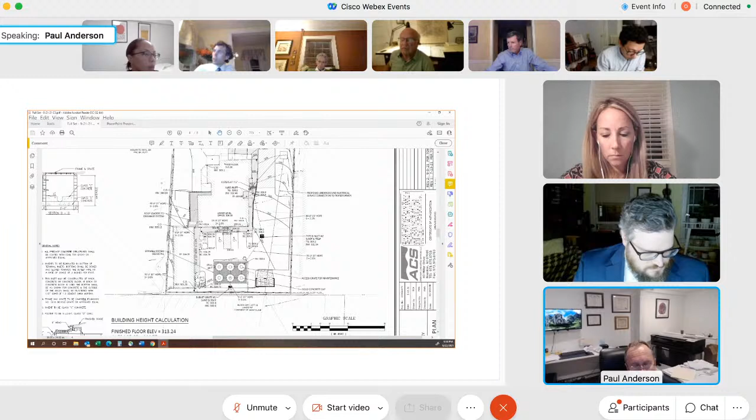Go ahead. Okay, so I think you just said there's one area where it's not the 6 inches. Is that just the handicapped access area? Just the handicap ramp, where I have the spot elevation for the handicap ramp. Because it's a type 7 ramp where it goes in as a level area and then pitches up to the left and pitches up to the right.

So in terms of the flooding concern Mr. McCulloch was raising, in terms of the garage, you have the 6 inches and then you have an additional little bit higher that the finished floor of the garage is. It's basically a sidewalk that is about 6 foot wide and it's pitched at 2% or less. So it's a minor increment above the top of curb elevation, but if a raindrop hits next to the doorway, it's going to run towards the top of curb. So it drains away from the building.

So the garage should be relatively safe barring a catastrophic storm. Yes, then it's going to first flow into the municipal lot before it actually hits the building, because that'll be a lower point. And I think that's a good thing, rather than it flow there than into a building. Yes, I agree. Mr. Harrison, I have one more question. Can we go to page 13 of the architect's presentation?

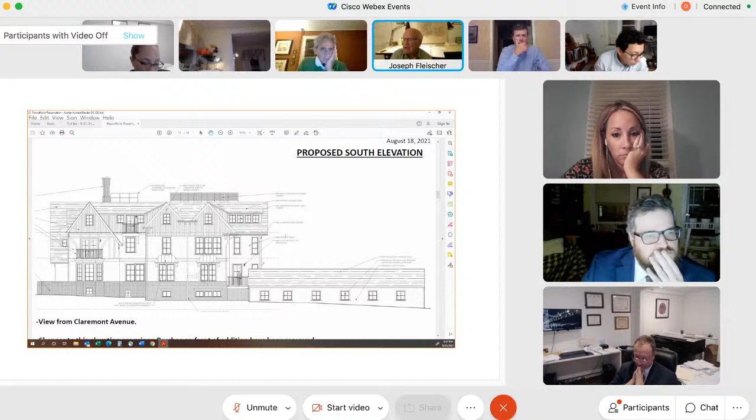And you can see that in your plans. And that sort of significantly takes away from the notion of this double gable pavilion that at least at the top is quite symmetrical and ought to continue straight down into the ground. And because of this wall of the connector coming out, as opposed to being recessed, which would allow the line of the pavilion to run through, it really takes away from the way it works.

I'd rather have the connection on the sidewalk even than over there, because that just sort of takes away totally from the notion of that double gable pavilion being essentially thrust out and going straight down to the ground and clearly standing forward of the other pieces. So that was the reason for my comment. Thank you.

Are there any members of the public who have questions for any of the witnesses who just testified? Janice, do we? The only member we have is Ms. Rombough. Ms. Rombough, you don't have any questions? No. Her question is, when will we be done and can we move on to her applications? Right. That's correct.

Okay, Ms. John Bass, did you have any further witnesses? I do, but would it be possible to have a 5-minute break so I can consult with my client for a moment to see if we're proceeding or going to ask to carry this application? Okay, we'll take a 5-minute break as well. And so where are we? We'll come back at 9:45. Okay. Thank you.

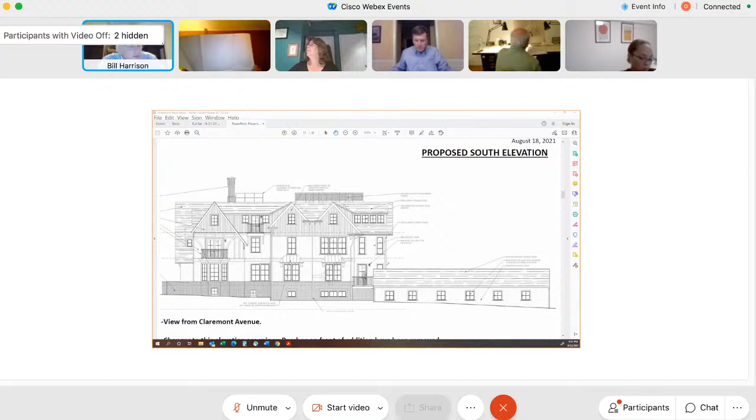Okay, the next applicant. No. Okay, I printed the notice. And we had it, and we still have it. Next application is that of Rixson and Danielle Hacking for property at 18 Warfield Street. This is an application for a variance to construct an addition to the house. The property is in the R1 one-family residential zone. The property is designated on the township tax maps as Lot 2 and Block 707. A variance is requested from Montclair Code Section 347-45D to permit a rear yard setback of less than the required setback.

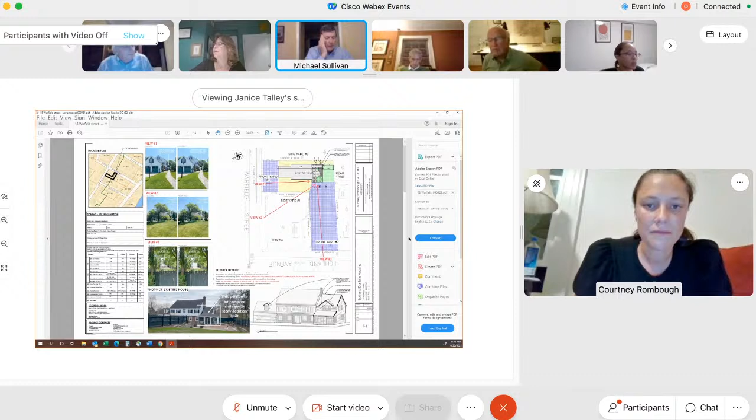Are taxes paid, and is the notice in order? Yes, taxes are paid and the notice is in order. Are the applicants present? Ms. Rombough, I know you're here. Are the owners here? Courtney, you need to turn on your microphone. There you go. Can you hear me? We can hear you. Okay, they are not present. I'm representing them. Okay, well, you're not an attorney, correct? No, I'm an architect. Okay, ordinarily, because you're not an attorney, the owner applicant has to be present. Mr. Chairman, I don't know if you want to move past that based upon the nature and scope of this type of an application, but that's the general rule.

I could have him call in. He's at a Dave Matthews concert, but he said he would call in if we need him to. That might be interesting. Well, can you see, and if we can, I mean, Mr. Sullivan, I assume if he gives an appearance that will be sufficient? Yes. Can you see if you can reach him, and even if you can just conference him in on your phone somehow, if that would work also. Oh, like FaceTime him. Yeah, I think otherwise it's going to be a technological nightmare. Yeah.

In the break, we've now moved 3 applications to that October meeting. And my question is, did we have so few applications that we can now still eliminate the special meeting? Joe, I'm actually going to be out of state. I'm going to be on vacation that day. Okay. We don't have anybody because we haven't filled Graham's position. I have nobody to run the meeting. That's fine. Then we get backed up, and I'm just trying to figure out if that's a problem. That's all. Yeah, I had planned this vacation at the beginning of the year, not anticipating that I'd have to fill in for Graham. No problem. Thank you.

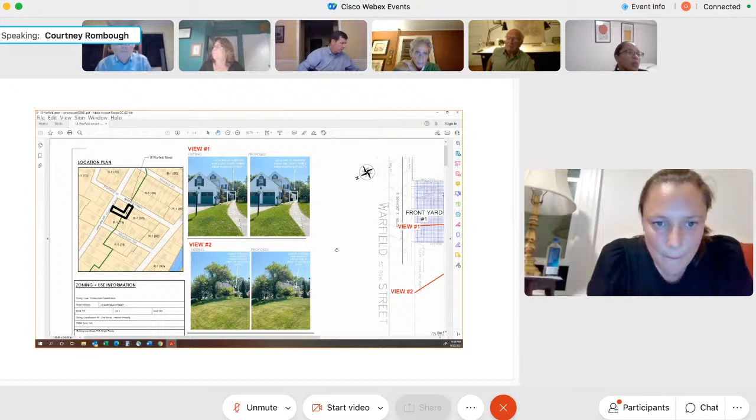So if you go to view 1 at the top of the middle of the page, please. Doesn't look like it's showing up on this. There we go. Okay. So view 1 is the view from Warfield Street. And you'll see on all the views, it's pretty hard to even see where this addition is from the street. On the left is what is currently there, which is a sunroom with a swooping roof. And on the right is the addition, which will pretty much look the same from this view.

On view number 2, this is when I'm standing up the street towards Highland a little bit. You'll see on the existing, it's a 1-story addition that swoops up to like a 1/2 story. So you don't see anything on the existing, and you do see a little bit of the addition from that view. And then view number 3 is when you're standing up on Highland Ave. It's over 100 feet away, but if you do walk up to the fence, you'll be able to see the difference. This addition does go outside the footprint, but it doesn't go further than the existing footprint on either side.

We go back to the site plan for a moment. In the top right corner, I marked 2 different options for locations of condenser units. And I believe I saw in a report that someone on the board prefers them to be in the rear yard setback as opposed to the side yard setback. So in the green as opposed to the yellow, which we're fine with. We're fine with whichever you guys prefer.

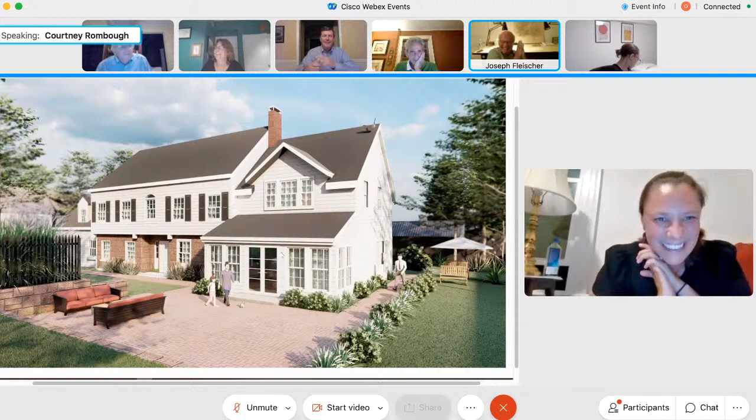All right, here's a color rendering of the new addition. There you go. Do you guys want me to go through the plans, or is this enough for you to start asking me questions?

That's up to you. It's up to you. I mean, if you're comfortable with where you are, let us ask questions, and then when we're done, I'll give you a chance if you want to add anything at that point that we didn't cover that you think we should know about. Yeah, that sounds good.

Okay, Mr. Fleischer, do you have any questions? I actually don't. I think this is a very nice solution, and it's well situated, and I like the changes that were made at the request of the Historic Commission. So I think it's very well done. I'm happy with what I'm seeing. Mr. Church, do you have any questions? I have no questions, Mr. Chairman. Mr. McCulloch, do you have any questions? No questions, thank you.

Mr. Simon, do you have any questions? So you agreed to move the condensers to the rear yard? We will agree to that, yes. So that eliminates one of the variances, correct? Correct. Yes.

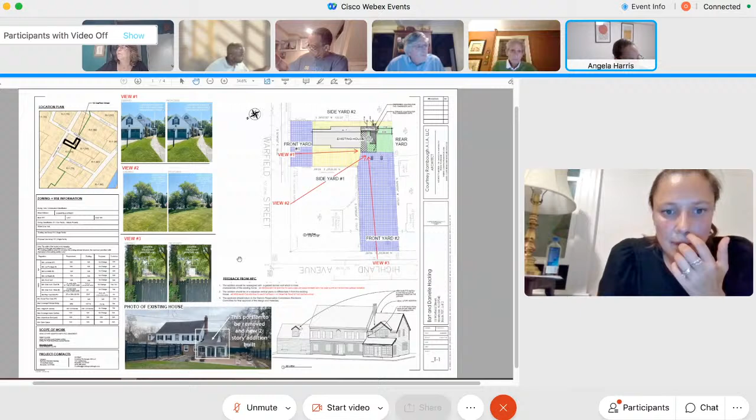And then the gable that you're adding, is that just decorative? That's on the second floor. Mind going one page forward. And please zoom in on the bottom plan on the left side. You see where the king size bed is in that primary suite? The gable is just above that. I'm sorry, I meant the dormer on the garage. Oh, that's existing. That's existing, okay.

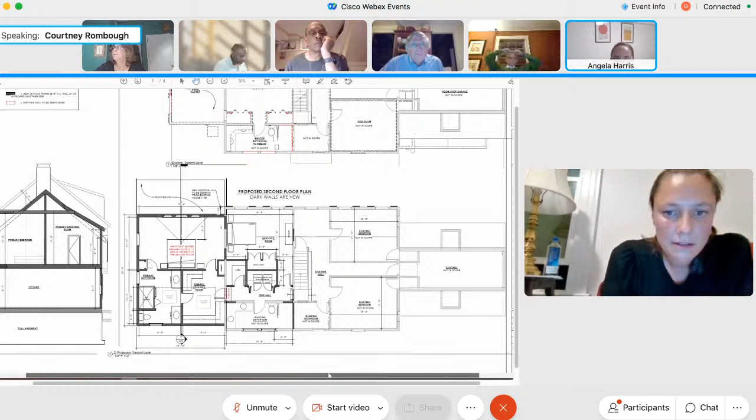We're just responding to the slope of that existing dormer for the new dormer. What do you mean you're responding? We're taking the slope that is on that existing dormer and using the same slope over on the new dormer. Not on the garage, but on the addition. Right. Nothing on the garage is changing on the exterior. Okay. Okay, thank you.

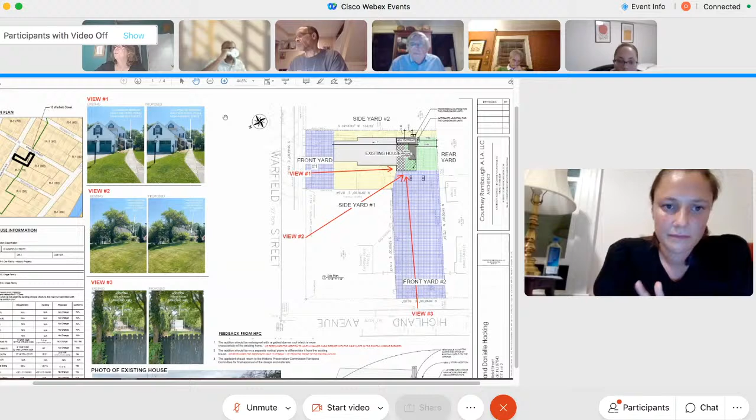Okay, Mr. Caulfield, do you have any questions? There's no basement under the new addition, is that correct? Or is it gonna be... They're trying to decide if they're going to do a crawl space or a full basement, and it's going to depend on the cost of the project. Okay, and there's a basement in the regular house, is that correct? That's correct. Okay, thank you. Mr. Vieira, do you have any questions? No questions, Mr. Chairman.

Janice, I'm confused on the side yard versus the rear yard, obviously not as to side yard number one, but the ordinance was amended. I don't know how to view this other than to apply a corner lot logic to it. The ordinance was amended so the rear yard is the one opposite the street frontage with the least dimension. This is not affecting how I'm going to vote on this. I'm just trying to figure out what I'm voting on, what I'm getting a variance for. The frontage on Highland is shorter than the frontage on Warfield. So I'm not sure why what's labeled as the Warfield side yard number 2 isn't the rear yard.

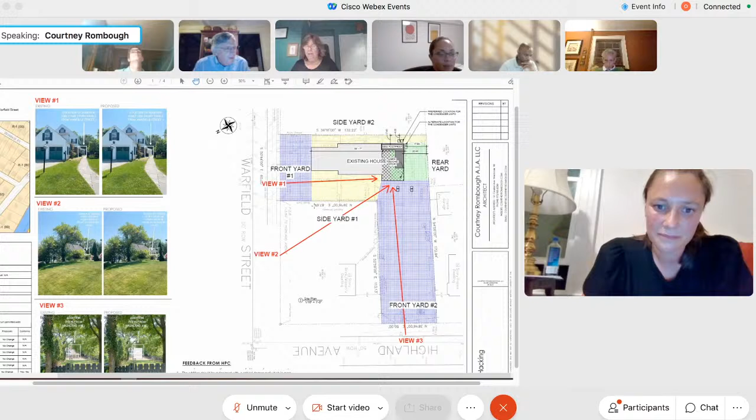But there's no other site like this apparently in Montclair, and there never has been, so there's no precedents to look at. So this is just what they decided, and we're going with it. So yeah, I went with Richard's interpretation of how to address this, which again was prior to my involvement in this.

But we seem to be creating a weird little hybrid, because if it was a true through lot, there would be no rear yard, period. Right. And so, while a chunk was cut out of it, it functions much more like a corner lot, as frontage on two perpendicular streets, which is a typical corner lot situation. Which would switch the rear yard for the side yard two, doesn't change how I view this. I think the condensers belong in the shaded green area, to not label it.

In that case, this would be the rear yard here, and you need the variance for this part of the addition, and this would be the side yard. In which case, the whole house would be in the rear yard. Yes, yes. Well, with corner lots, we frequently end up with, it depends upon which yard based on where the house is situated, but they're almost always a problem because of the two, in this case, extremely large front yards, leaving very little yards. But as I said, I don't have a problem granting the variances. They're following the line of the existing house in that yard.

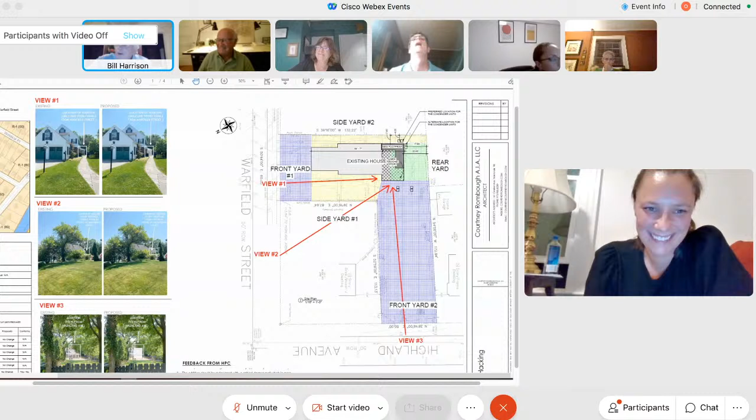I'm going to do this just for the sake of doing it. Are there any members of the public who have questions, testimony, statements, comments, anything at all they want to say about the application? I assume, Janice, based on what I'm seeing, that our attendants are the TV station, Ms. Rombough and the board, and you and Michael. Yeah, there's no attendees. Okay.

Okay, Ms. Rombough, do you have anything further you wish to add before we discuss and vote on the application? I don't think it matters, but there is a document with some letters from two of their neighbors supporting this addition. Yeah, unfortunately, we really can't accept those letters. If they were present and they wanted to express their position, that would be one thing, but the board can't accept letters. Okay, good to know.

Okay, we'll start discussion with Mr. Fleischer. I think this is a very nice solution. I have no problems with this. I'm in favor of this application, and I don't have any problems with the variances that are required as they've been defined. Okay, Mr. Church. I would concur with Mr. Fleischer. I'm in favor of this application also.

Mr. McCulloch. I'm also in favor. Mr. Simon. I'm in favor. Ms. Harris. I'm in favor. Mr. Caulfield. Same here, in favor. Mr. Vieira. I'm also in favor of the application. Okay. I'm also in favor of the application, given the very unique configuration of the lot and the location of the house on it.

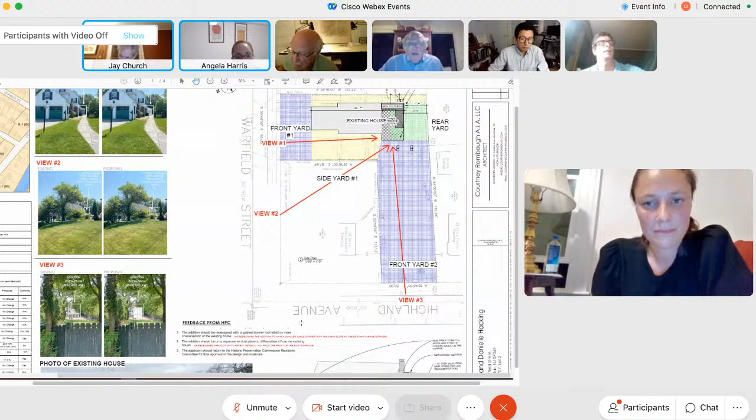Does someone want to make a motion? Move approval of the application with the condition as stated by the chair. Second. All in favor, say aye. Aye. Aye. Any opposed? Any abstentions? Okay, go call them and tell them to enjoy the concert even more. Thank you all. I appreciate it.

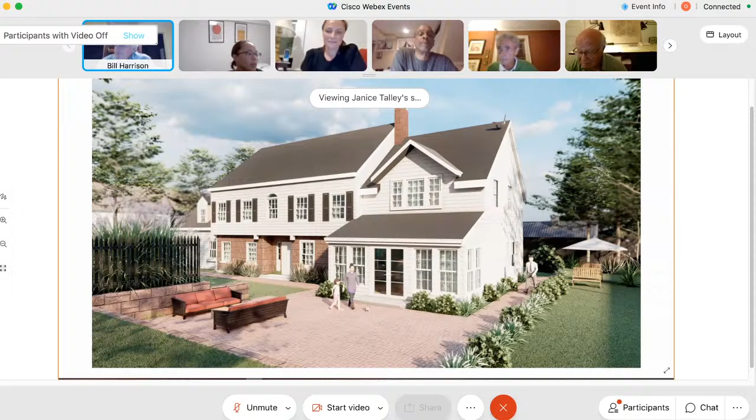And we clearly are going to have a very busy October agenda, so enjoy your relatively early night off, and we'll see you mid-October on October 20th. Is there a motion to adjourn? Move to adjourn. Second. All in favor, say aye. Aye. Any opposed? Any abstentions?